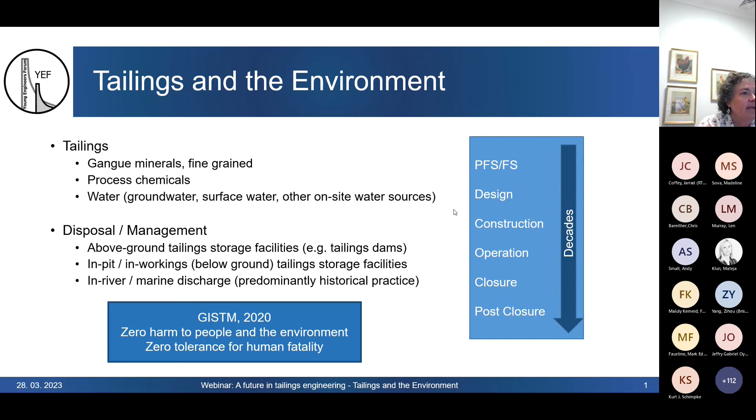So we're thinking about land, including dust, surface water, and groundwater, and how people and ecosystems interact with those aspects, those segments of the environment. I want to talk about adverse impacts, and many of you will have front of mind the breach or failure type of impact, where the tailings dam actually fails. And this is where the fatalities happen. This puts workers, downstream communities, downstream waterways and ecosystems at immediate risk and long-term harm.

So there's immediate human health and environmental impact, absolutely the potential for fatalities, as per the most recent ones, I think in September last year. But also, even after cleanup, these lead to longer term environmental and human health impacts, where the tailings have inundated creeks, they've changed the sediment characteristics, they've inundated land, and there's ongoing seepage to groundwater and surface water, and ongoing uptake by flora and fauna, and therefore the communities that rely on that flora and fauna.

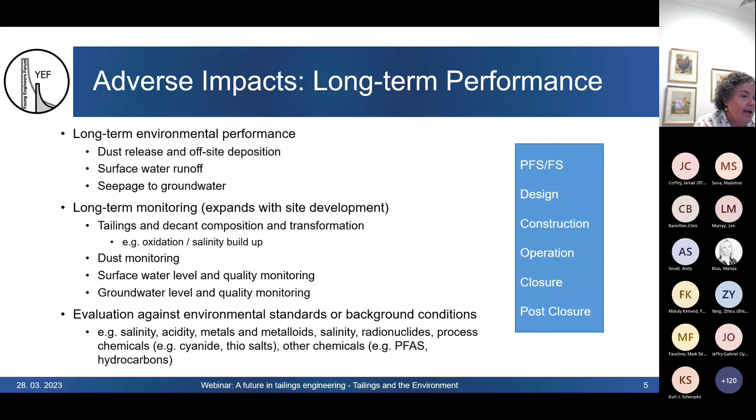So when we talk about environmental monitoring, it needs to be adaptive, both to address the time scale over which these facilities operate, but also to address that over those decades, our technical understanding of facilities changes, as to the contaminants we look at and how we understand them. Climate is changing, environmental regulations change, and community expectations change. And they are going to become more stringent, not less stringent through our careers.

So questions we need to ask are: are the TSF walls or floors acting as a barrier to seepage to groundwater or surface water? Are there areas where seepage is apparent on and beyond the walls? Is the seepage from the walls or is the seepage from the tailings? What are the controls that affect the impacts to groundwater or surface water? And is surface dust sufficiently controlled? And what are we using to control that dust? And what are the implications of that?

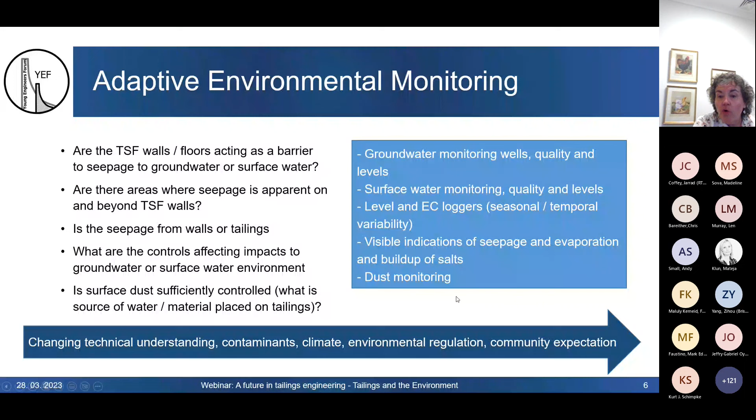So for all of your facilities, you should have extensive and robust groundwater monitoring wells, surface water monitoring sites, level and electrical conductivity loggers so that you can capture seasonal and temporal variability. We need to monitor for visible indications of seepage and evaporation and buildup of salts, and we need to monitor for dust, all with the goal of protecting ecosystems and the supporting communities.

Okay, so to summarize, when thinking about tailings and the environment, we need to consider meeting these environmental objectives and monitoring the performance of the facility from PFS through to post-closure. So we're talking about decades. The monitoring program needs to consider people and the receiving environment and how that changes through time, and see it as a tool to assess performance of the facility, not just compliance. Is our facility working the way we expect it to and need it to? So the monitoring directly informs risk management and remediation.

And as I mentioned before, it needs to be adaptive to meet changes that we're seeing throughout the life of these facilities, particularly with respect to climate change and variability, emerging contaminants, our technical understanding, and the expectations of the regulators and our communities who live downstream.

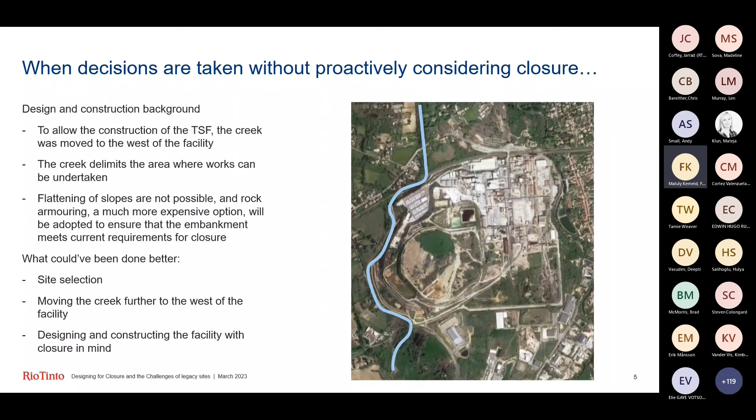The next example, this is another facility. What you're seeing here is a study that looks at this facility closed 50 years from now. The red, orange, and yellow colors show the areas of the tailings facility that will still be saturated 50 years from now. So it means that tailings still have potential to seep, and we'll still have to treat that water 50 years from now, okay? So what happens?

This facility was built very close to the sea. Parts of that facility were built in terrain that was below sea level, and part of those facilities had their floor excavated to allow the construction of the embankment. So they brought the floor of the facility to below groundwater level. Back at that time, this facility is almost 60 years old, a liner wasn't really something that was considered for all facilities. In this case, they thought that groundwater could neutralize the leachates from this facility, so the solution was just to excavate and place the residue there without any liner.

So what problems do we have now? We do have a long-term leachate treating problem. As I mentioned, this figure shows a scenario 50 years from now. And it's a facility that for closure is quite difficult because the terrain can be quite saturated because of seepage. So we do have construction challenges in this facility as well.

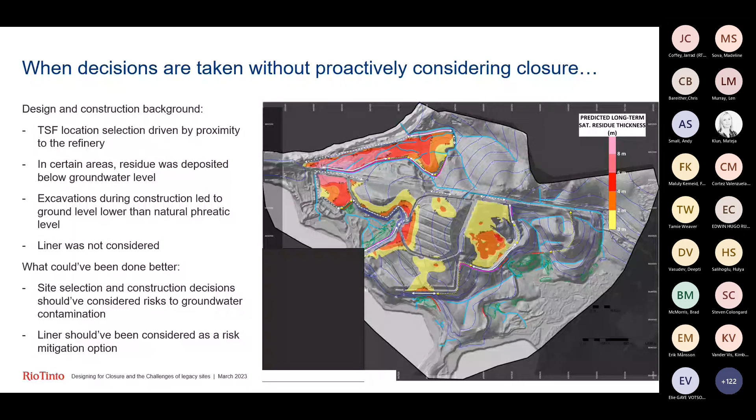And then this is another one. This is an interesting one because it's not about site selection. It's about a decision that was taken during the construction. They were building the core of the embankment, and they found two springs. And they decided that they had to deviate the water from those two springs to allow the construction and the good compaction of the dam.

But the issue is that that deviation line was not registered in any as-built. We have two photos of this line, one is this one that I'm showing, and another one in the construction report, but there is no as-built of this line. And the methodology used back in the 90s is not something that we use nowadays because of the risk of piping. So we're developing a solution to monitor this risk and ensure that this facility is safe and can stand in perpetuity.

So again, what could have been done better? Development of as-builts of the new features, even if it's a construction feature that won't be used for the performance of the dam in the future. It's very important to have any modification registered somewhere. And clearly document the construction method. We are unsure how the material was compacted around this pipeline. That's why I mentioned clearly documenting the construction method.

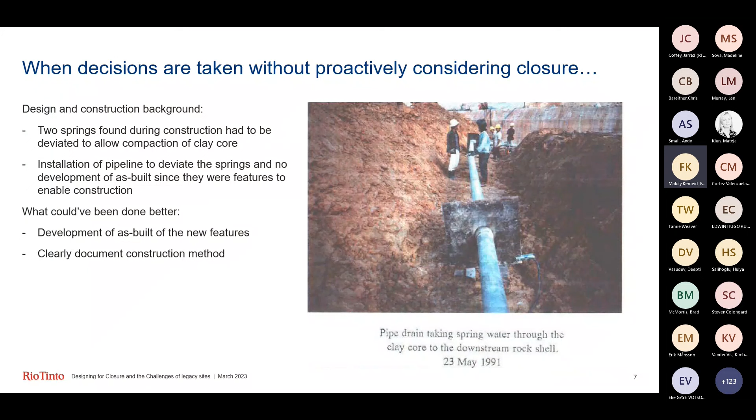So usually when we get these legacy sites, we get a black box. We don't know what is inside. We don't have the documentation. There is very poor history. Most people that worked on those dams are not alive anymore. And usually these facilities had several consultants, most of them closed over the years. So it's really hard to get that information. You need to build information about those facilities through geotechnical campaigns, topographic surveys, and observation.

Another challenge that we usually get with these facilities is that sometimes they don't even belong to the company anymore. You only have the liability of that facility, but you don't really have access to that land. So everything needs to go through permitting processes, and it can take much longer than at a site that's owned and operated by the company. The other challenge with these legacy sites is that usually you have external stakeholders, the community, that don't even know that those dams are there.

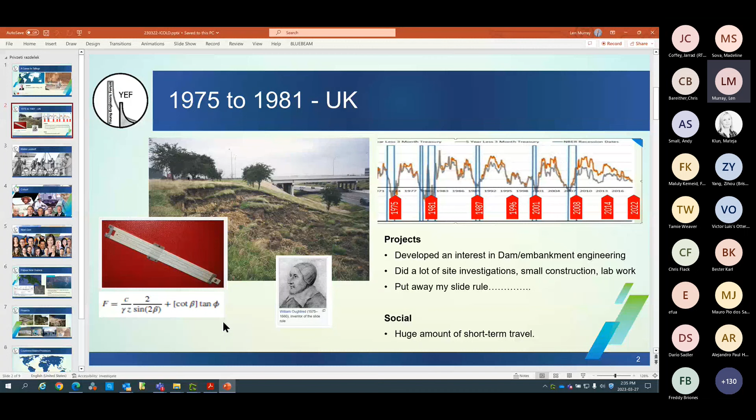And I think that's one big change, the pace of technology. It's just stunning how fast the change is and that we have to adapt to. The other good thing about not having such fast computers is I relied a lot on hand calculations just to check what I was doing. This is a simple infinite slope equation down the bottom, but there's many equations for pretty well everything you'll do as a geotechnical engineering geology type person. And I heartily encourage young people to check their complex calculations as much as they can with hand calculations.

So I moved from the UK, and I joined what was Klohn Leonoff then, now Klohn Crippen Berger, in 1981, right in the middle of that recession.

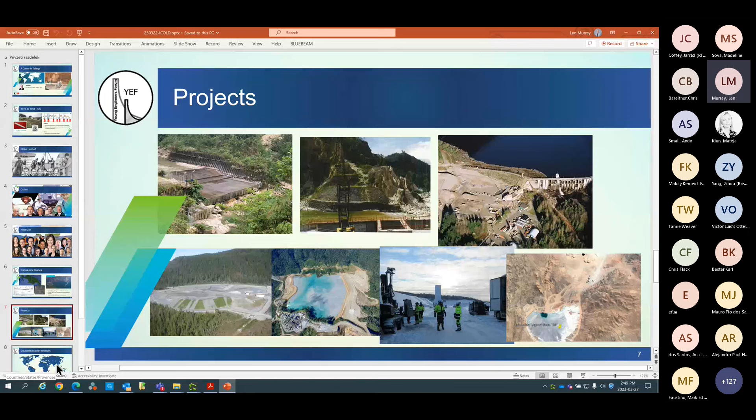A shot here in the Atacama Desert. This is actually Escondida, and for this particular site, the main challenge was water recovery. So I had to learn a lot about unsaturated soil mechanics and water release as you deposit hydraulic tailings over a several kilometer long beach, evaporation, seepage, and water recovery. So the dam itself was not that difficult, but understanding the unsaturated soil mechanics and water recovery side was very interesting.

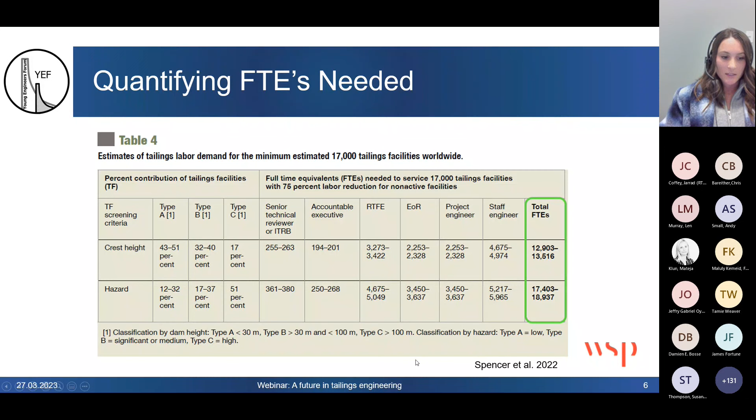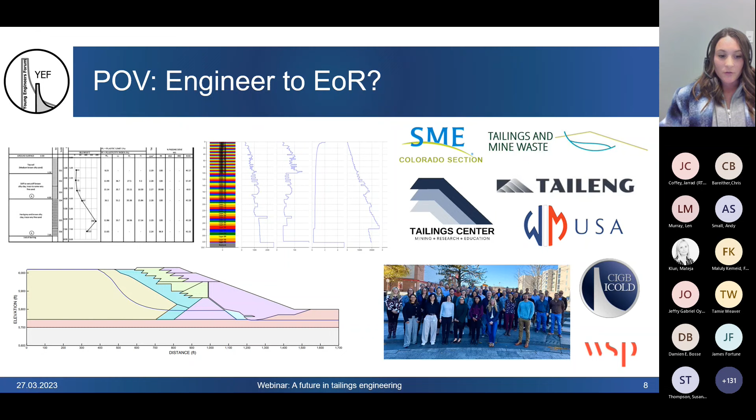I've had about 5 years of experience in the industry as a consultant, with lots of time spent in the field doing drilling projects, construction quality assurance and monitoring, and also time in the office, running models, writing reports, and performing calcs like I'm sure many of you have, and time outside of work as well, participating in conferences and professional organization events. Do I have all the tools and resources I need to fulfill the roles that are outlined in GISTM? If we look back at this table, I fall within the bucket of a project or staff engineer.

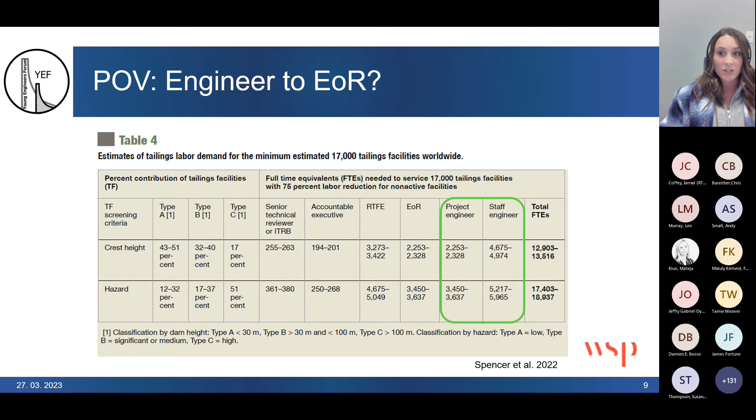And assuming I continue on my current trajectory, it seems like the role of engineer of record could be something I could aspire to. The GISTM framework and associated guidance documents recommend approximately 10 years of experience is needed to take on this role. But what is the role, and do I even know what the required responsibilities are? Both those tangible, the ones stated in GISTM and guidance documents, but also the intangible aspects of the role, such as communications and some of the soft skills needed.

Earlier this year, I performed an internal survey within my group at WSP to see if others understood the role. Out of 42 respondents, the average rating on a scale of 1 to 5, 5 being complete understanding, was about a 3.75. And I think I fall within there. I know the responsibilities outlined in GISTM. But with all the guidance documents and frameworks and personal interpretations of the role, it can feel like a lot to sift through. And I know that they've been authored to provide clarity of the role, but it's easy to feel like it's bogging down the essence and even mystifying it a little bit.

Can this be attributed to the lack of understanding of the role, or is it other factors? I didn't specifically research this finding, but it could be an interesting question for you all to pose to yourself and your colleagues who are interested in any of the roles outlined in GISTM.

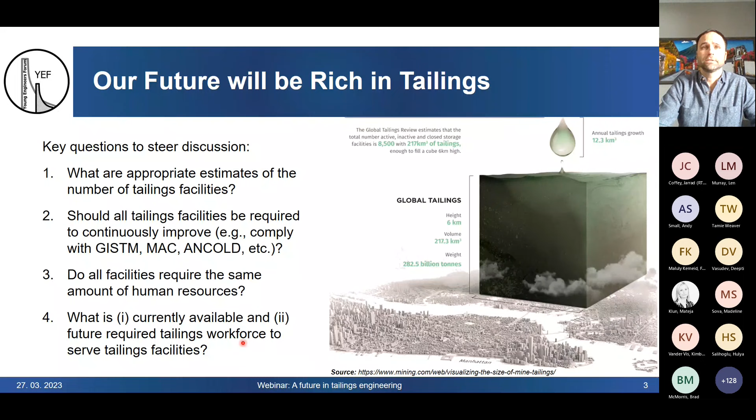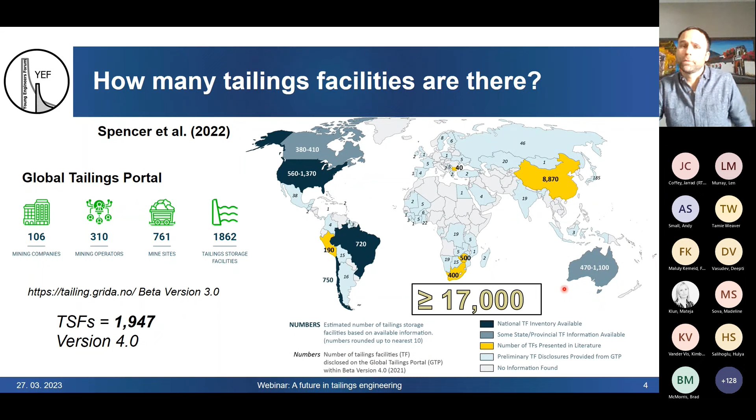So just leveraging a couple data points from Maddie's talk to move forward. In the Global Tailings Portal, these are publicly disclosed ICMM members and others who are voluntarily disclosing, we're at about 2,000 TSFs. From the study that a former student of mine, Louise Spencer, did, we estimate over 17,000. You'll see Andy Small mentioned in the text. They had a group that are estimating above 25,000. So we know there's a lot.

Building off these numbers that Maddie also presented, I'm just going to focus on two things here. If we look at the amount of labor needed to serve the 2,000 that we currently have, let's assume we have that number, right?

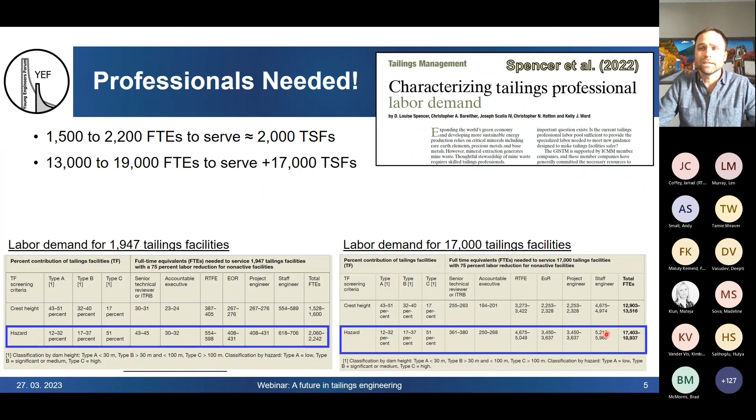Let's assume these numbers of people exist and that we need to build up and build more capacity. So let's just take these other numbers as reference here. And regardless of what's the actual right number, we know that there's a gap. And I can feel this gap all the time, because my students graduating in the past maybe had one or two interviews. Now they have 8 to 10 interviews and they have offers from everyone.

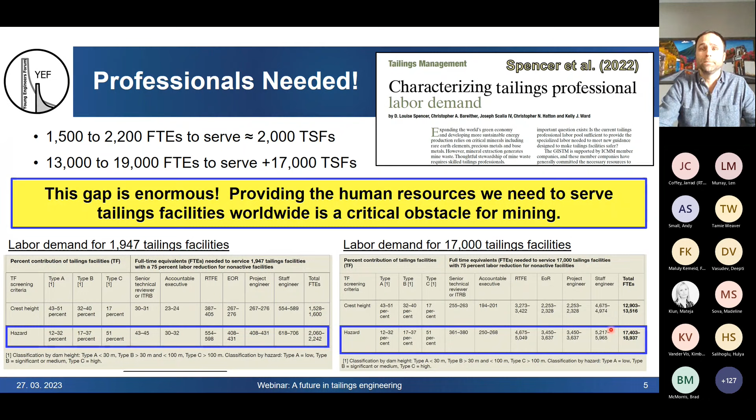Everyone's hiring, everyone's looking for people. Some companies are turning down work because they just don't have the people to do it. So we know that there's a demand for people in the industry. So what I want to focus on right now is engineers. I'm in the position of educating engineers. Most of the students working with me go out and work in mine waste groups in consulting and in industry.

So if we look at those numbers again, and we're just looking at the numbers of project and staff engineers, we need those engineers first, because if we're going to build up to, say, RTFEs, to EORs, to ITRB members, those are going to need training initially. So if we don't bring people in from the bottom of the pyramid and build that stable base, we're not going to have enough people to move forward. So we need these people.

And so if we just take these numbers as they are, we need an additional, let's say, 3,000 project engineers and 4,500 staff engineers. We obviously don't need those right now, but we need a lot of engineers moving forward in the future. I'm just going to go with these numbers because they're based on a study that we've conducted. So the question then is, where do we find these engineers? How do we train these engineers?

We know that whatever we generate as a community, demand is global. Len showed a great schematic there of all the projects he's working on. They're all over the world. And we want all these tailings facilities to be adequate and continuously improving, so we're limiting the threat to our society.

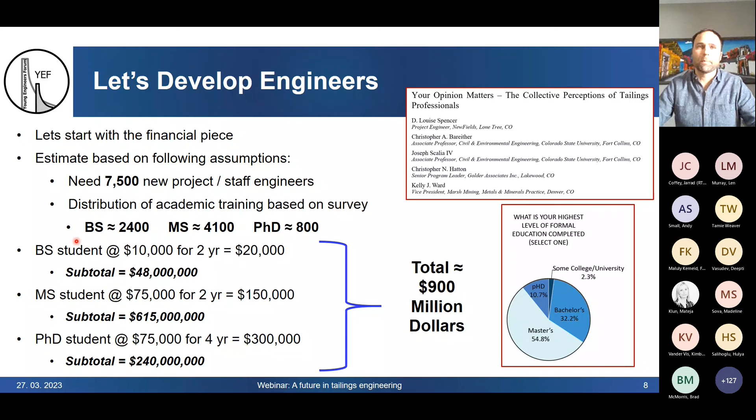You sum all those up, you get about $900 million. Again, it's just a number to put in scope the investment that you actually have to put into education to get people to pursue a path of interest. Okay, that's a lot of students. Who's going to train those students? That was the next question I looked at.

Well, in the United States, we have certain groups that are interested and focused on growing tailings programs. In Canada, there's a number, obviously I've shorted here, but I said 6+. There's a lot of people up there working. Australia has a lot. Around the world, there's more.

So what I said is I clearly don't have them all. I saw that there's a really broad distribution on the line. If you know where there are active tailings groups at different universities, definitely send them my way. I really want to know.

So I took what I estimated and doubled it. I say, well, let's assume there's 30 active groups. So now we have to distribute the engineers we need among those. So now we get to this number of different groups actively having programs that are growing engineers that are going to be moving out into the field to pursue careers in tailings.

A quick check on if those are reasonable. At CSU, we've had a group of about 2 professors, starting at the assistant level and moving up. And in the last 10 years, we've graduated about 40 students. Most of them are working in the tailings workforce. So we need to increase productivity about 4 times. So it's reasonable numbers, and we can do it.

So you look at, can you invest in these programs, have the right people to move them forward? I believe that's all possible, right? You look at these annual graduation rates, maybe in the teens for MS, a few PhD, you can add those people actively to tailings and mine waste groups around the world. And I think with some faculty, about 3 to 4, you can really have a lot of productivity in these groups.